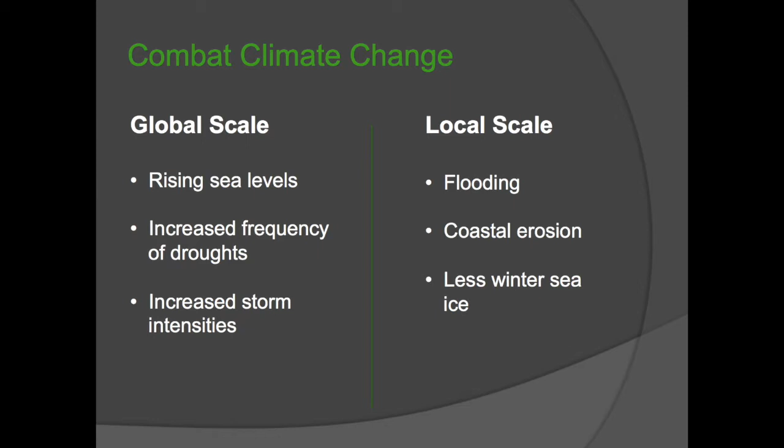So this is the main reason for me. This is the reason why when I wake up in the morning I do what I do, and that's to combat climate change. In my view, it's one of the most challenging issues that we face right now. On a global scale, climate change is going to lead to rising sea levels. It will displace millions of people that live near the coast. Increased frequency of droughts in many places will lead to water shortages, food shortages, as well as increased storm intensities. So hurricanes and cyclones are going to become more intense, causing more damage.

On a local scale, here in Newfoundland, we have, I think it was 18,000 kilometers of coastline, and many homes, businesses and infrastructure are on the coastline, and it's very important to people. Coastal erosion, flooding, these types of things are going to be very significant to those people living on the coast, and it's going to have a very large impact here in Newfoundland.

Another thing is winter sea ice. A lot of people here in Newfoundland, especially in Labrador, rely on winter sea ice if they're gathering wood or going out hunting. It's very important to them. And with the decreased sea ice, it's going to be a very big impact on those lives.

The second thing is energy security. Here in the developed world, when we flip the switch, we know that the light is going to come on, at least most of the time, and we kind of take it for granted. But that's not the case everywhere in the world. Energy is really important to people. But if we don't look at ways of sustainable energy consumption and production, those energy shortages are going to become more and more common. As well, countries who have lots of energy and countries who don't will have increased tension between them, leading to conflicts.

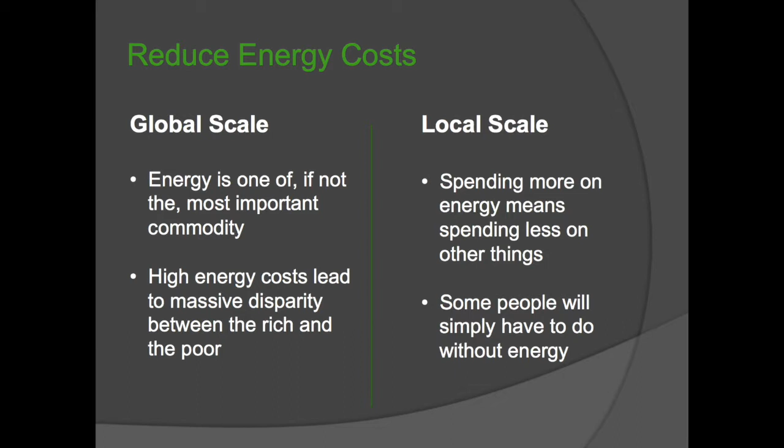And this is what a lot of people consider to be the most important: reduced energy costs. In my view, energy is one of, if not the most important commodity to people. It's in everybody's lives every single day. On a global scale, for the 2 billion people in the developing world, energy is extremely important. Lowering the price of energy for them is more important than lowering the price of food or water or medication, because energy is what's going to really lift them out of poverty. So the price of energy to them is very important.

Here on a local scale, you can think about yourself. If, let's say, your energy bill was 30% more next year, what does that mean for you? What are you going to spend less on next year if you have to spend more on energy? And there are even people living here in the province who are just scraping by right now.

They're just able to afford their energy bills. If their energy bill is 30% more next year, what are they going to do? They're simply just going to have to go without the energy that they need, which is very devastating.

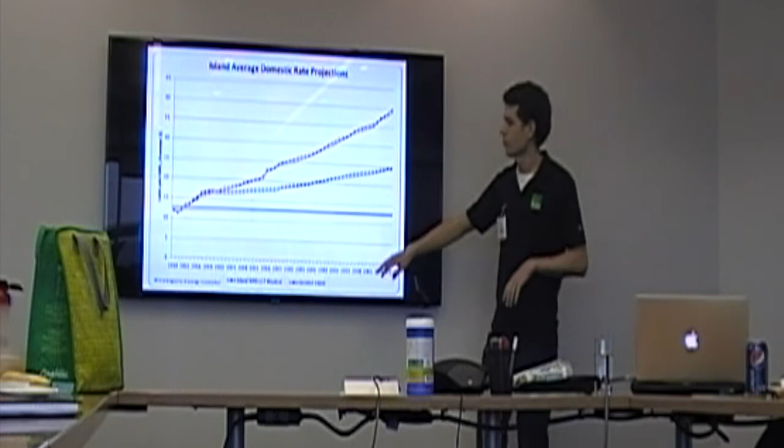This is showing where the cost of electricity per kilowatt hour is today. So you can see within just a few years, these are projections from our utility companies, and you can see how even with the Lower Churchill project coming online, the price of energy is still going to rise.

So now that I talked about why it's important, what types of things can we do, what does it involve to achieve sustainable energy consumption and production in your home? So on the consumption side of things, you can break it down into two categories. There's the energy conservation and then there's the energy efficiency.

So energy conservation are the more behavioral type things like turning off your lights, reducing your room temperature, washing your clothes in cold water, air drying your dishes and your clothes, those types of things. That's your energy conservation. And then the energy efficiency is how well can you use that energy to do what you're trying to do.

So how well is your home insulated? With that heat that you're putting into it, how well does it retain that? Do you have a very good sealed home so you're not losing drafts through the home? How efficient are your appliances, your lights, and your heating systems, those types of things.

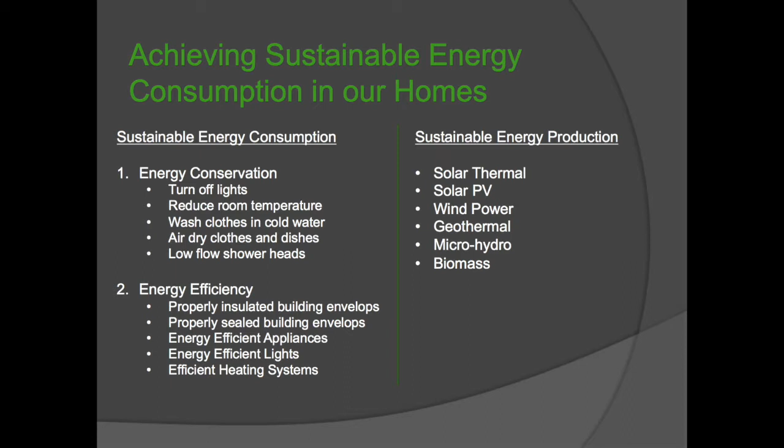So then on the energy production side, there's not that many ways that people can produce energy at their own home. Here's a list of a few that you could potentially do on a home, and I'll talk more about them later, why certain ones are prohibited right now.

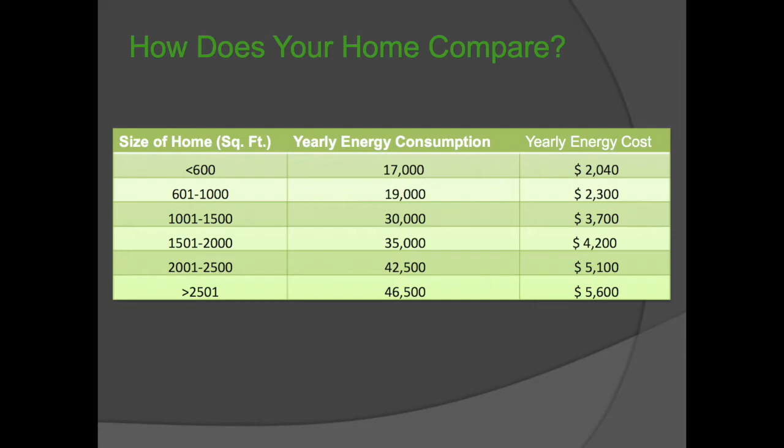So this is just a quick chart. I just wanted you guys to see how your energy is comparing with the national average. So on the left column there are different brackets for your size home. So find out where your size home fits there. The middle column is how many kilowatt hours of energy you use per year, and then here is what your yearly energy cost would be. So these are the Canadian averages for these size homes.

So if you can look where you are, you might say, okay, I'm average, or I'm above average, but just because you're average doesn't mean you're good. And the reason why is, what if I told you that that same 2,500 square foot home that has an energy bill of $5,600 a year could have a bill of $3,700 a year? The same price, same amount of energy as a 1,000 square foot home. That's what an energy efficient home means.

And so the way I wanted to detail this to you is to walk you through what we did. This is my father's home here in Newfoundland, and we did exactly what I just told you. This is a 3,000 square foot home, and we took our energy bill down almost 45%. So I just wanted to walk you through the steps that we did to get there. That way it'll give you guys an idea of what's actually possible when you implement these types of things.

That's a pretty big, that's a high number, Josh, 45%. It is 45%. Can you imagine? That is essentially cutting your bill in half. It's very significant.

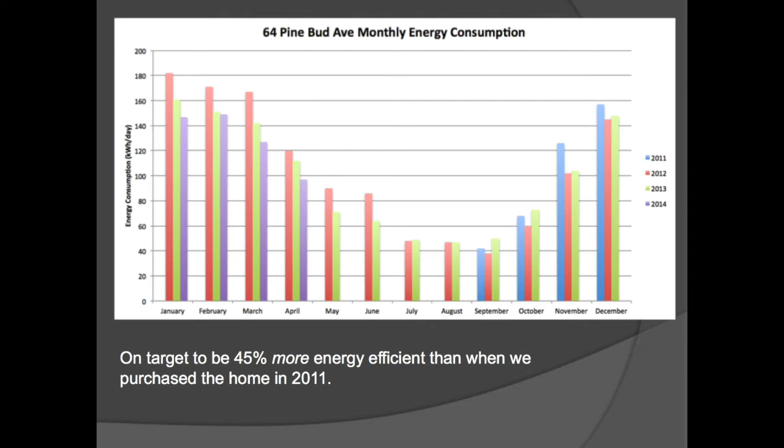This is one of my favorite graphs, and I love to share it with people, and I love to update this graph every month at the end of the month when I get the bill from Newfoundland Power. I'm really excited about getting the bill. Not many people are excited about getting the bill, but I can't wait for that day so I can update this graph. This is showing our monthly energy consumption through the years.

So we purchased a home in 2011. Starting in January of this 2014 year is when we had all the energy efficiency upgrades completed, as well as the solar system installed. So the 4 purple bars on the left-hand side of the graph are what we've been seeing recently. The vertical axis is in kilowatt hours per day. And so you can see in January we were significantly less than all the other years.

And then in February, I just wanted to note, you guys have known this winter has been extremely cold. So even with this cold winter, we've been able to see these reductions. This February was 14% colder than the previous February, and this March it actually set a record. This March was 30% colder than it was in March 2013, and we were still able to see this kind of a reduction, so I was really happy to see that.

How's that 45% though? I don't see it in the bar graphs. Right, so 45% is more energy efficient throughout the entire year. By the end of 2014, all these purple bars here, when you add all of those up, they're going to be 45% less than if you added up all of, let's say, the 2012 bars that are the red. So compared to when we bought the home in 2011, we're able to decrease it by 45%.

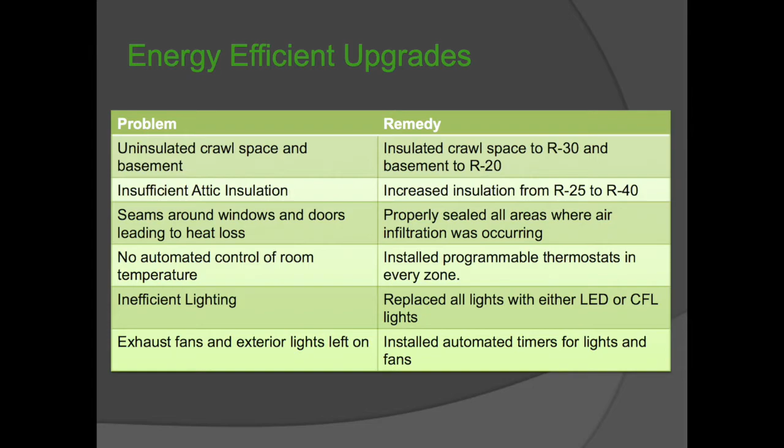We have a lot of thermostats in our house, and I'm sure your homes have lots of thermostats as well. I think we had 13 thermostats in our home. So it's a lot of thermostats, but we replaced all of them with programmable thermostats. We replaced all of the lighting. Mostly, I would say we have about 80% LED lights, and the rest are CFLs. We got rid of all the incandescent lighting.

Can you explain a little bit about the LED and the CFLs? Because when I went looking, I paid, I think it was $10 for an LED light. But when I bought it, the light is going to last me 35 years. And I thought, are you serious? It just astounded me. Yeah, LED lights are definitely the future, even more than CFLs. CFLs are the cheap, efficient thing to buy right now.

But they don't even last that long, in my opinion. They say that they last longer than incandescents, but they're very temperamental. And so I don't think CFLs are going to be around much longer. It's going to be LEDs that are going to be around. And they also contain potential toxins. Absolutely, yeah.

So LED lights are light emitting diodes, for those who don't know. In the past, they used to be constrained to simply your Christmas lights and those bluish white lights that people don't like. But now in recent times, LED lights can be just as beautiful as your normal traditional incandescent lights.

And that was one thing that my mom was really worried about. She liked that nice warm light, and she was very concerned that replacing all these lights was going to make her home look cold and blue. But the LED bulbs you can buy now, at Home Depot, are just as nice as the incandescent ones. You just have to make sure you buy the right one; they go by the temperature of the bulb, and you just have to ask, hey, I want a warm light, what light do I buy?

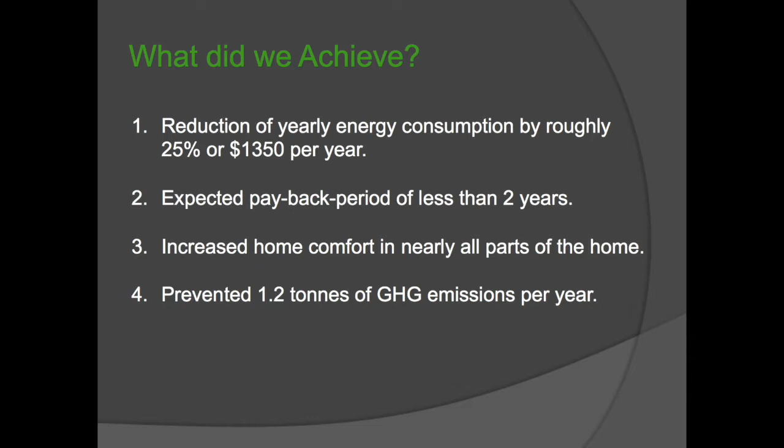So, completing all of these things, what did we actually achieve? Just from energy conservation and energy efficiency upgrades, we were able to reduce our energy consumption by 25%, which represented almost $1,400 per year. So just in conservation, we were able to get down 25%. That was really great, and the great thing is it didn't cost a lot of money to do this.

Insulating your attic, insulating the crawl space, overall we expect the payback period to be under 2 years, so that's really nothing. And then every year after that, we're going to be saving this amount of money, and as energy prices go up, we're going to be saving even more. So it's really a no-brainer to do these types of things.

And the other thing a lot of people don't realize is your home is going to feel more comfortable in almost all parts of the home. For example, in the half of the house that had the uninsulated crawl space, that floor was always cold. I've gone to a lot of houses for dinner where their floors are cold, and they say, oh, we have an unfinished basement, or we have a crawl space, and the floor is just cold.

Or sometimes if they have seams around windows, you get that draft coming in. So it's not comfortable. But doing these things, not only are you going to save money, but your home just feels more comfortable, and that matters a lot to people.

So when you look at how much greenhouse gas this reduction is going to prevent, just that 25% represented 1.2 tons of greenhouse gas emissions here in Newfoundland. Here we have a lot of hydro, so our emissions are not as much as many other provinces of Canada. So even with Newfoundland's relatively clean utility grid, this is still quite significant: we prevented 1.2 tons of greenhouse gases going into the environment every year. So that's great.

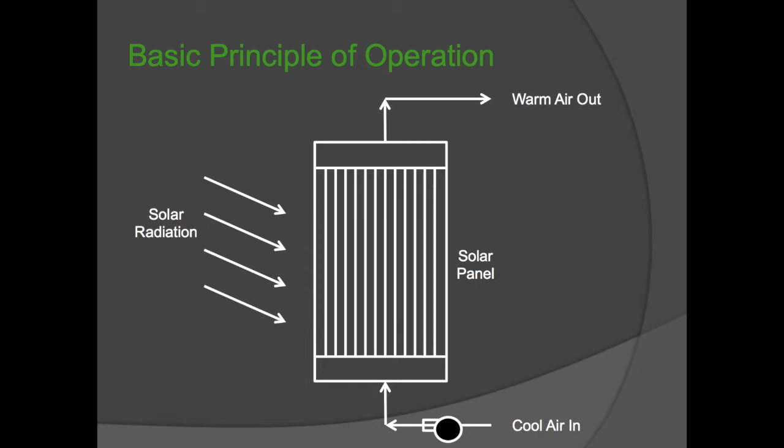Cool air from a space that you want to heat is pulled out through a small fan and is pushed through these panels. And so then there's several channels or tubes. So in the case of the pop can heater, they have the cans stacked on top of each other with holes drilled so the air can travel up through them. And as those cans are painted black, as the sun is radiating on those cans, it transfers the heat to the air, and then the warm air is delivered back into the space.

So it's extremely simple. There's only one mechanical part, a fan, that you really have to worry about. So it's a very simple system, and the operation of it is very simple as well.

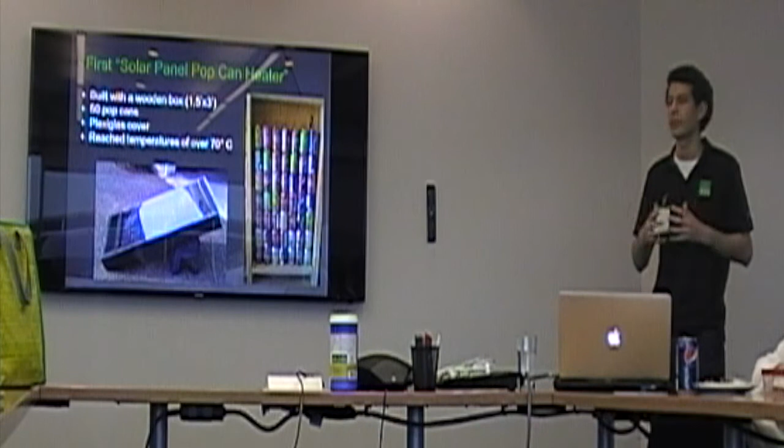But what was amazing to me is that it only took me 3 hours to build this, less than $100 in materials, and I was able to harness the energy of the sun. Even though it wasn't the most practical, it really hit home that this is really simple to do. In the first test that I was doing, the temperature of the air in the outlet header coming out of the panel was over 70 degrees Celsius on a bright sunny day.

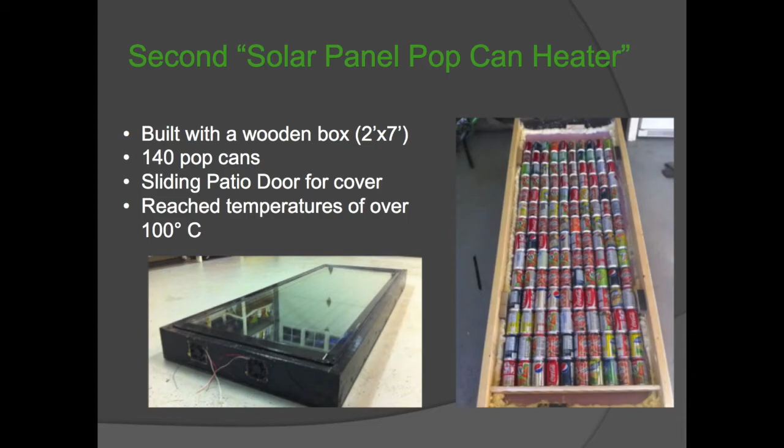So because it was such great progress, I decided I was going to build my next one. I wanted to go bigger this time, and I wanted a glass cover this time. So I went on Kijiji and I found someone who was selling a sliding patio door that they were just getting rid of. I can't remember why they were trying to sell it, but I went and bought the door. It was like 20 bucks. It was a good deal on this sliding door.

And so then I built this panel around the dimensions of this sliding door. So this one you can see 140 pop cans. Got my family to drink a lot more Coke and Pepsi and Nestea. Took quite a while to collect all these cans actually. But with the bigger panel, we were actually getting even higher temperatures, over 100 degrees Celsius this time.

So actually the plan was, I had convinced my father that we were going to put this on our house and start piping this air into the house. And yeah, that went over very large. He was on board, but we were living in Halifax at the time, and due to work, he relocated back here to St. John's, so he sold his house up there.

We didn't want to bring the panel to Newfoundland, so I just kind of put the panel on Kijiji, and literally within less than 7 hours, I had 3 people contact me. I want this now. I only put it on there for $100, the same amount of money it cost me to build it. I just wanted to get rid of it because my parents are relocating.

And so I stayed at university, at Dalhousie at the time. So this idea of the solar heaters kind of went in the back of my mind, and I left it alone for a couple of years as I focused on my studies at Dalhousie. But then in the last year of my degree, we were tasked with doing a senior design project. And so myself, along with 3 other students, I brought back that idea and convinced the other guys that it would be a good thing to do a design project on this.

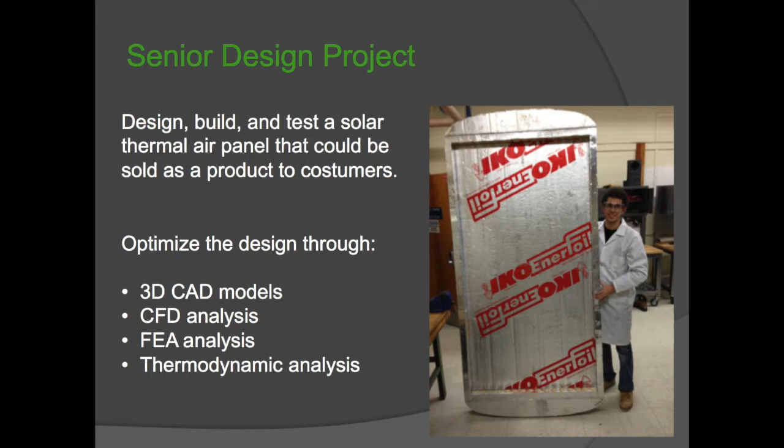And so we convinced our professors that, yeah, there was a lot of mechanical engineering here that we actually could do on this thing to take the product from just your simple solar pop can heater to an actual collector that people could use on their homes, and how would you do that in a practical sense.

So we did a lot of optimization of the collectors. We built CAD models of them. We ran some computational fluid dynamics analysis of them. One of our students completed a finite element analysis on the structure of the panel, as well as I completed a thermodynamic analysis of the panel and how we can optimize it.

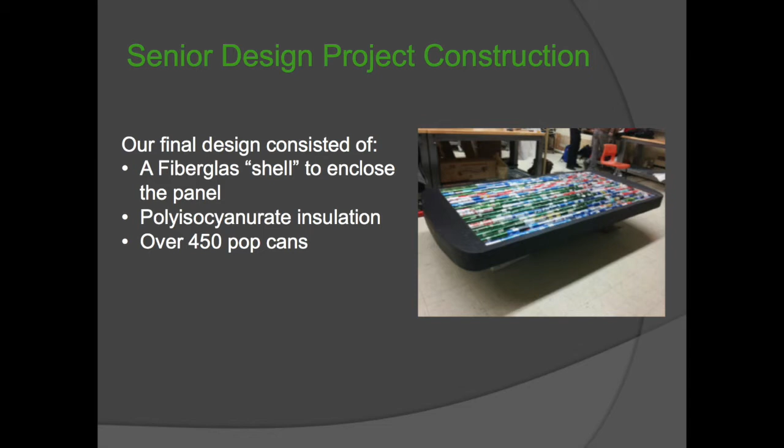So we came up with this design where we went with a fiberglass shell to enclose the whole panel. We used a special type of insulation called polyisocyanurate insulation that was good for the high temperatures that we were going to be seeing, because a lot of people in these solar collectors have been using just the standard pink foam, which is going to melt at these kind of temperatures, so that's definitely not the way to go.

In this one we used over 450 pop cans, and so it was quite a lot of drinking, but luckily in engineering you have lots of friends who are willing to help you collect these cans. So we built this collector, and then near the end of the semester we tested it to see that it met our design criteria.

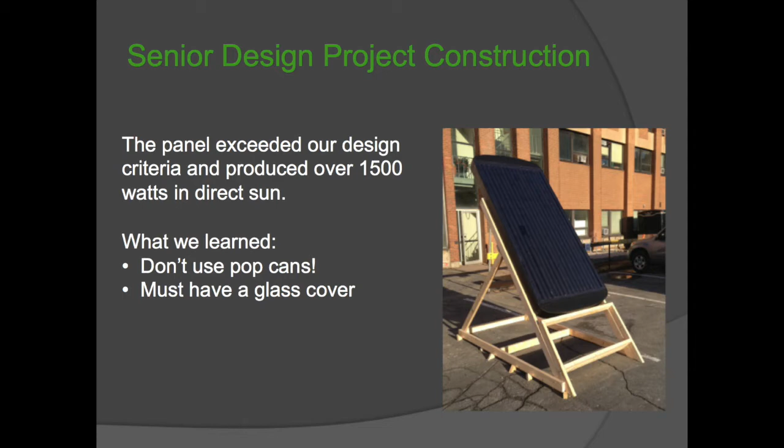So we set out for a panel that would produce 1,500 watts in direct sunlight, and that's exactly what this panel was actually able to achieve. 1,500 watts of power production in direct sunlight. And so we learned a lot of things in this process, and one of the biggest ones is to not use pop cans for the heaters.

It may sound cute that you're using recycled cans, and it may be good for the environment, but at the end of the day, the amount of work and labor that went into preparing these cans for these collectors was not feasible if you wanted to sell this. So all these 450 cans had to be collected, cleaned, cut, all stacked together, sealed. It was a crazy amount of hours that we put into it, and we learned that this is not the way to go if you're trying to make these panels to sell them.

And then the last thing, you definitely need a glass cover for these collectors. Using any kind of plexiglass like some people do is just not an option if you're really looking for a solar collector that's going to last the same lifespan that a typical solar collector should last.

So I graduated, as I told you, in May 2013, and as soon as I graduated, I went ahead and designed my next iteration, or what I call my final prototype of these collectors.

And again, I convinced my dad. I said, okay, this is the one that we're going to put on your roof. This is the final design, and we're going to put them on your roof. And because he was on board with it, it was great because it forced me to consider a lot of the things that we didn't think about before.

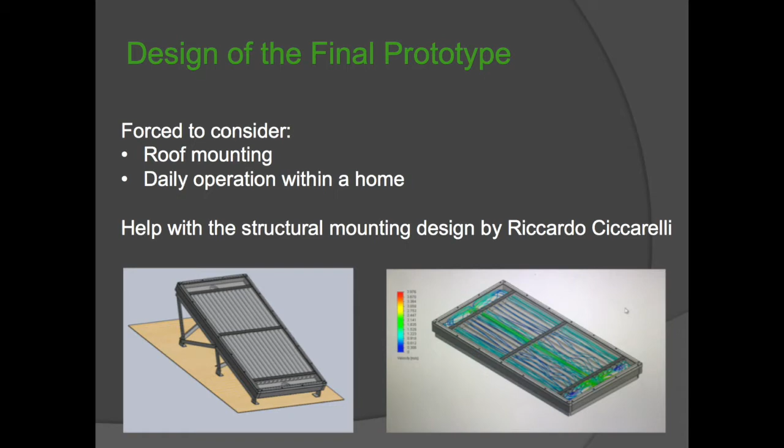Like, how do you actually attach this collector to your roof? And especially in the windy city of St. John's, how are you going to ensure that it's not going to fly off in the wind? As well as, how are you going to connect this panel to your home so it's actually delivering warm air to the space? So a lot of thought went into those.

So all the structure mounting components were designed by my colleague Riccardo Ciccarelli. He is also a graduate from Dalhousie. We took his design and we went to a structural engineering firm here in St. John's, where they actually went and certified the design.

And we needed that certification because we went to the city of St. John's to get our building permits. Before we could actually put any of these collectors up on the roof, we needed our building permits. So we went through the procedure to make sure that everything was copacetic in that regard.

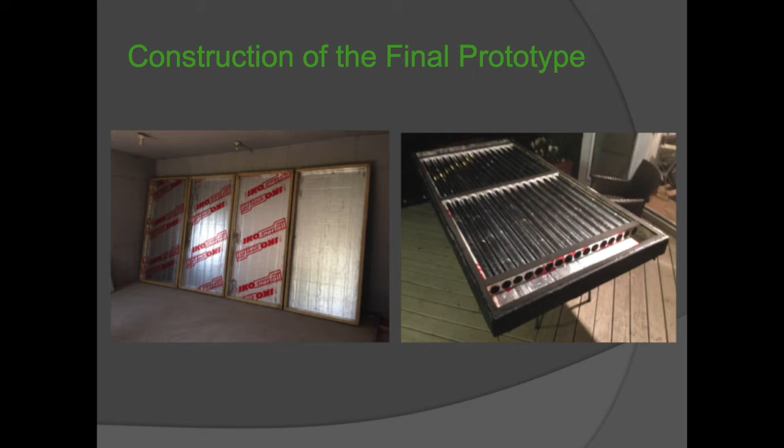So after the design, I began constructing them. For our home, I figured out that 4 of these collectors is what we could accommodate. So you can see here, these are the collectors. They're 8 feet by 4 feet in size, each one. And one of the big things on these collectors, you can see here, is the internal tubes.

So instead of going with the pop can idea, we actually manufacture our own tubes out of aluminum flashing. We cut strips of aluminum flashing and roll it into tubes. That way we can have one continuous channel the whole way, and it's very cost effective to do it. We don't have to collect cans. It's a very simple way to do it.

Another improvement that we've done in this design is inside of each of these tubes we have internal heat exchanger fins to promote heat transfer as much as possible. So with all the sun that we collect, we want to extract as much of that heat as possible so that it's not radiated back out into the environment.

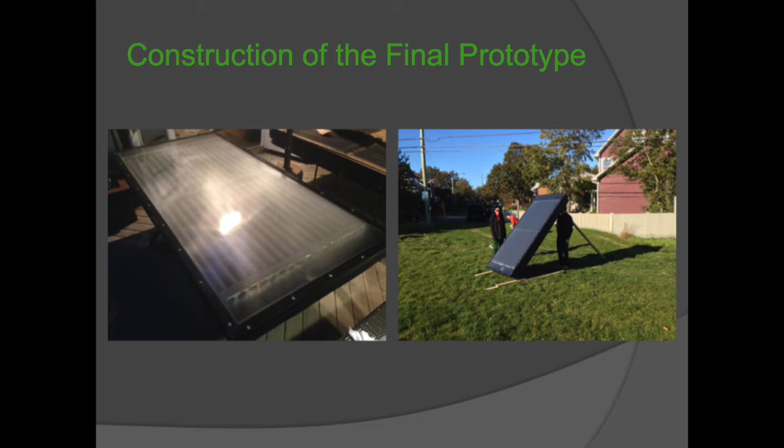So here's a few pictures of the finished panel. The glass on this cover is actually a solar glass, which simply means it's tempered glass with a low iron content. So it's going to be able to receive as much of the solar radiation as possible. I had this special glass shipped; I think it came from somewhere in the States. So I bought 4 of those sheets of glass for the collectors.

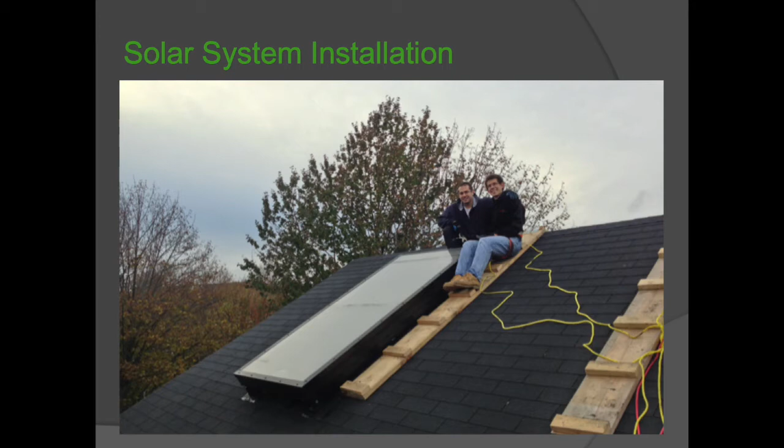And so we brought it out into the park and we did lots of testing, and the panel performed actually better than what I expected. So that was great. Then we were tasked with actually putting them on the roof. This was a lot of fun, especially when you have the weather to cooperate with. It took a lot of time, but we used scaffolding up the front of our house, and with the help of my friend and 2 other people, we were able to lift the panels up and bolt them to the roof of my dad's house.

How heavy is each panel? Each panel is about 100 pounds. Wow. Yeah, so it's quite heavy, so we had a winching system to lift it up there. And this is the part that my dad was the most concerned with. For each one of these panels, there were 6 holes drilled in the roof, times 4 panels. So my dad said, "You're going to drill 24 holes in my roof? Are you crazy?"

So it really forced us. I came up with a good penetration design, special flashing that essentially made it virtually impossible for any water to leak into the penetration. So that was really important for my dad. I spent a lot of time making sure, and looked at what other people doing solar collectors did, how they mounted them to roofs, and adapted it to the way that we were going to mount them.

So after the panels were installed up on the roof, next we were ready to install all the equipment inside the house to actually set it all up. That consisted of installing the ductwork that's going to connect to these collectors and then deliver the heat to the different spaces in the home.

As well as installing the fan that's actually going to move this air. The fan is installed up in the attic. As well as the controls to make it all automated. So the system comes on when the sun comes out, delivers the heat, and then when the sun goes down, it all shuts off automatically.

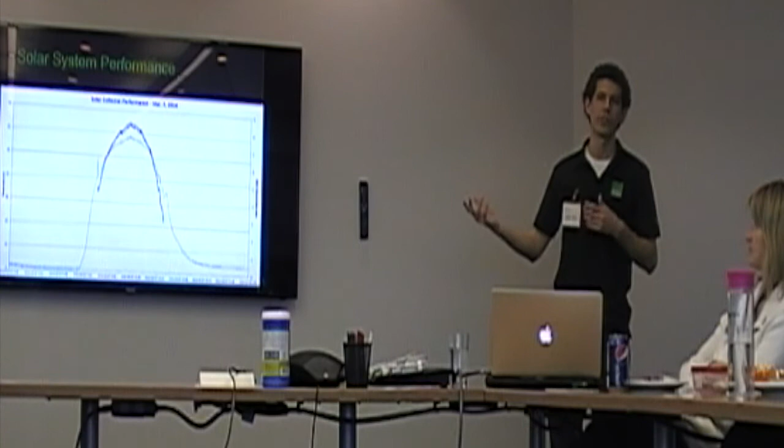And on this day, when you integrate over the whole time, the system produced 45 kilowatt hours of energy that day. So on a day in March, that represented about 1/3 of the energy that the house consumed over that 24-hour period. But the solar system was able to cover, like I said, 45 kilowatt hours of that energy, which is direct savings that we didn't have to pay for.

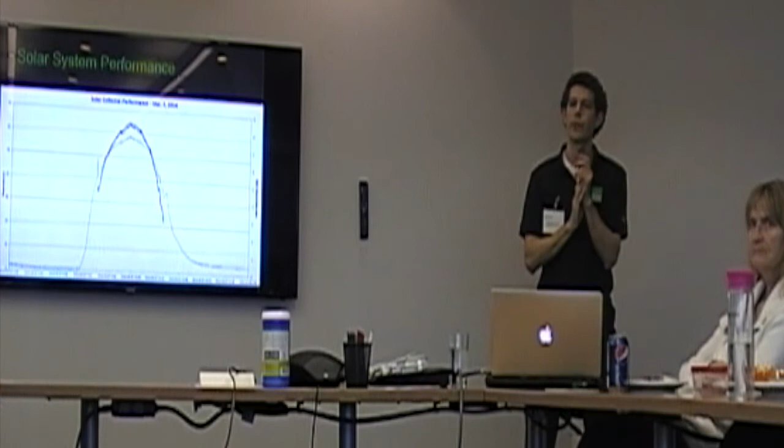Does that factor in the cost of the fan energy? Yes, it does. So the fan runs at 300 watts right now. So 300 to the 8,000. It's very small, but yes, it is factored in here. I took that into account.

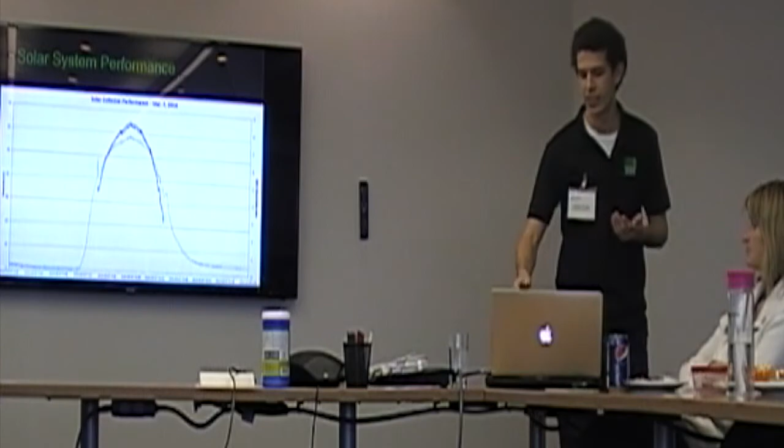And I guess the other thing to mention is, a lot of people say, that's great, you got these collectors that are going to heat your house during the winter, but most of the sun is in the summer. We don't need any heat in the summer, so what does your collector do in the summertime? So in the summertime, we're simply just going to use that hot air to heat our hot water for our domestic hot water needs.

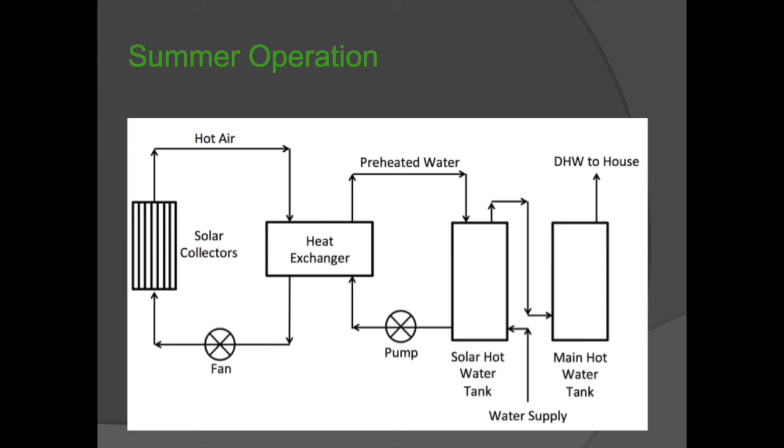So what we've done, we have a separate solar hot water tank right next to our existing tank. And through a pump, it just simply recirculates the water in this tank through a heat exchanger. And that heat exchanger is what's receiving the warm air from the collectors. And so this is all automated. When the sun has come out, it controls when the fan and the pump run, and the fan and pump won't run, obviously, when there's no sun available, so it's all automated.

So in the summer, we designed for 4 collectors because we were able to use that amount of heat in the winter. In the summer, even though we're going to be heating water, we're still going to have more heat than we can actually use. So we project that we're only going to be able to use about 30% of the heat that we produce in the summer for water. That shows how little energy you need for water heating compared to space heating.

So unfortunately, the rest of that energy is going to be just exhausted outside. But that's what we're going to do in the summer, and we do this because you're putting this solar system up on your house. You need to maximize the amount of energy that you get from it if you want a short payback period.

So what does this system achieve for us? So like I said, this is an 8 kilowatt system, and we're estimating that it's going to produce roughly 7,000 kilowatt hours of energy per year. So after all our energy efficiency upgrades that we did, that's going to represent about 20% of our annual energy needs, which is pretty awesome that you can say 20% of our energy comes from the sun. I think that's really great.

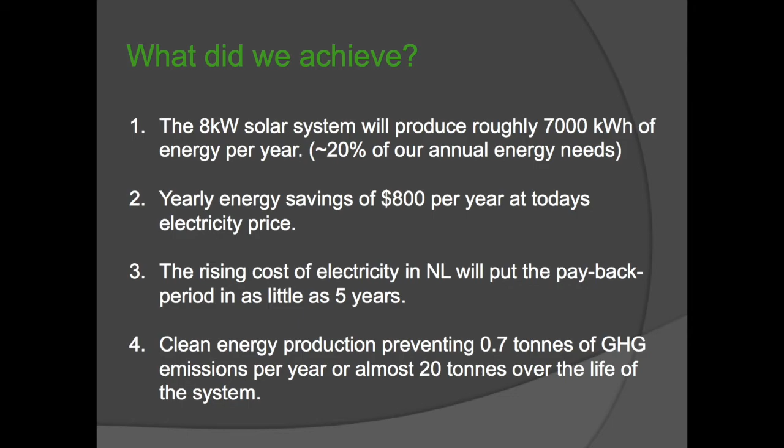But as I showed you that graph of the Nalcor projection for the rates, when we use those rates from the projection from Nalcor, the payback for this system is going to be less than 5 years, which is extremely low for any kind of solar system. Most solar systems, you're looking almost at a decade or more for payback.

And so then the great thing is that this energy is clean and is from the sun and zero emissions. So just from this system alone, we're going to prevent 0.7 tons of greenhouse gas emissions from being emitted. And if you look at over the lifetime of the system, roughly 25 years, that's almost 20 tons that it's going to prevent from going out into the atmosphere. So that's great news.

So, like I said, I founded this company, Empowered Homes, and my goal is to help homeowners and customers do the exact same thing that we were able to achieve for my dad's home. As I've been mentioning, there's 2 ways that we're going to do that. We're going to focus on both reducing your consumption, and if you would like, adding your own production capabilities. So we provide home energy auditing services to help people figure out how much energy they can save, how much it's going to mean for them and how much it's going to cost.

As well, we're going to actually provide services to help people complete these upgrades. It takes a lot of work to get contractors in. If you want to insulate the attic, maybe you're not comfortable doing that, but you really want to get it done, we'll help facilitate getting the contractors and making it very low hassle for you. You just put us in charge and we'll ensure that it all gets done for you. Very low hassle.